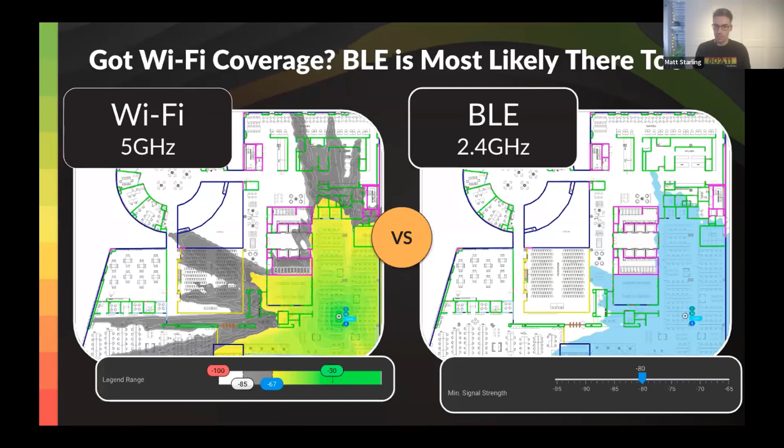Ekahau AI Pro. Yeah, so guys, the sad reality is that most of us, we have access to BLE radios inside enterprise-grade access points. Most of these APs have programmable radios these days that you can use for multiple different purposes. And almost none of us uses these BLE radios built into the APs. Okay, that's the reality. So let me tell you why you would like to consider using BLE built into your APs. So first thing is to transmit beacons.

So try to imagine your APs, multiple of these access points, they transmit beacons very frequently. And then you're walking around with your mobile phone, okay? And then your mobile phone listens to these beacons, and based on the knowledge of the location of the APs and the time, the RSSI of the beacons it heard, it can trilaterate its location, and then you have a blue dot on the map. It's like a turn-by-turn navigation. That's one use case, very strong one.

Some vendors, like Mist, even have arrays of directional BLE radios where it's even more accurate to have the blue dot on the map by default, okay? And it's easy peasy, it's really easy to deploy. Then the second thing that you might benefit from BLE radios is to receive beacons. So your radios in the access points, they listen to beacons from BLE tags. So think of it as asset tracking. You attach a small BLE tag to your, I don't know, your cart, your laptop, your power tool in a

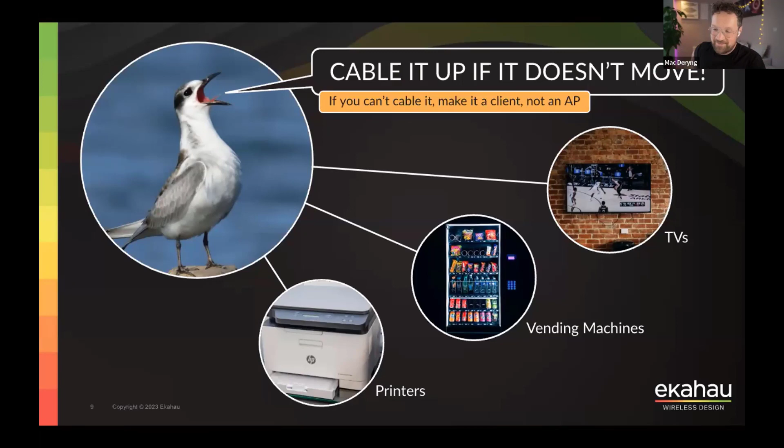And Mac, I know you put this slide together, but we were talking with the team, we thought you missed a bit of a trick here, because since you used a bird, you could have used a starling, and then it would have been a bit of a pun, but never mind, maybe next time. Or instead of a bird, I could have put like an X, right? Yeah, true. Well, maybe we should have an X that goes across it now.

Okay, so now, guys, I mentioned at the beginning that there is a difference in approach when it comes to designing, optimizing, and validating your dual band and tri-band wireless first networks. So I will start with the dual band and introduce it here. Then Matthew will talk you through the tri-band, and then we will go through a very nice demo of dual band versus tri-band, how to design for it, and this kind of juicy stuff.

So first of all, dual band, what we mean by this is just 2.4 and 5 gigahertz radios inside an access point. If you have the same number of dual band and tri-band APs, dual band of course gives you less capacity. If you want more capacity with dual band to match the tri-band design, then you simply need more radios. You need more access points. In the design here, at the bottom, you can see a massive difference in the number of APs. For this particular design that we will be demoing in 2 minutes, I needed 28 dual band APs to have pretty much the same capacity as 17 tri-band APs.

So going for slightly more expensive APs, like tri-band 6 GHz enabled APs, will probably still be cheaper, massively cheaper, than dual band APs. And that's not only because you need more radios if you're using dual band and require high capacity, but if you want to reduce your CCI, which stands for co-channel interference, another name for same channel overlapping or same channel contention, then you need to start being creative with dual band APs because we have a limited number of channels.

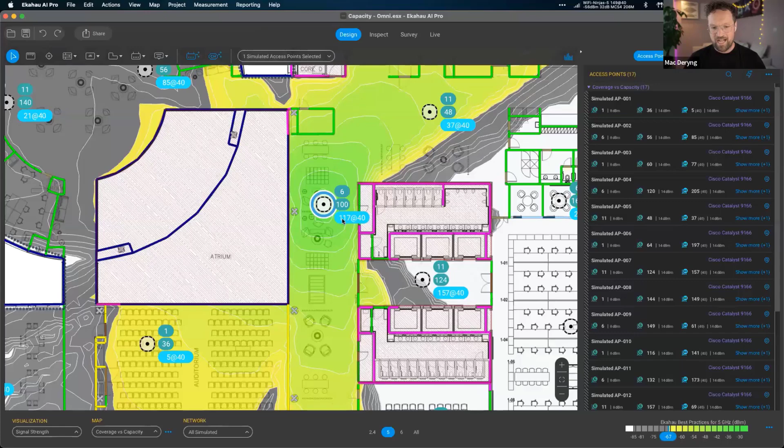So, guys, this is Ekahau AI Pro. And what I have on the screen now is a fairly big office, single floor. And now I'm using tri-band AP. So when I zoom into any access point, let's say this one here, you can see that it's on channel 6, 100, and 117. So 2.4, 5 gigahertz and 6 gigahertz.

So what I wanted to highlight here is the success criteria. So I highlight my inclusion area around the office, and let's see what's inside. Since it's a massive office, we will have quite a lot of devices. What I assumed here is we'll have an equal spread of 5 and 6 gigahertz capable devices. Okay, so I appreciate not all of them will be 6 gigahertz enabled on day one, but most of them, the new ones especially, will be 6 gig capable.

So what we have here is 175 Wi-Fi 5 laptops and Wi-Fi 5 smartphones, and then 175 Wi-Fi 6E laptops and Wi-Fi 6E smartphones. What we've also assumed is that when you are using a laptop quite heavily, like on a Zoom call, for example, you use between 2 to 4 megs per second. When you are sitting on a Zoom call, you won't be using your smartphone too much. It might be on a background sync, you might be checking your email, whatever, but you won't be streaming your Netflix or YouTube or anything else.

So one device will have quite high-ish SLA, so 4 megs, and the secondary device will have quite low SLA, like 1 meg or even lower than that. So we don't want to overkill it here with scoping the capacity. And now when you ask Ekahau if your design will cater for this capacity, the capacity must be quite practical. Okay, so don't overdo it.

If you are designing for 500 users, you probably don't need to assume that you will have 500 users in the office all of the time, because some of the users will be on holidays, in the toilet, grabbing coffee, whatever. And when you have like 350 users at peaks in the office, not all of them will have 4 devices. Some of them will have 2 devices. Some of them will have 3.

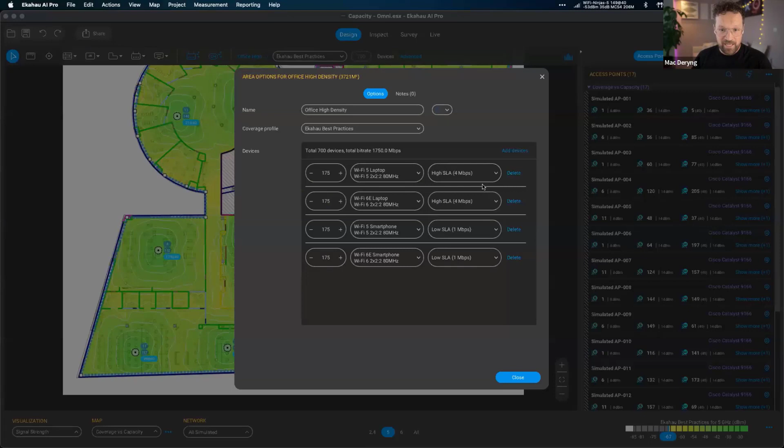So I think this is quite practical for the size of this office. I counted the seats there, so it's quite practical. And we are designing against Ekahau best practices, the Ekahau best practices coverage requirements. So I will show you instead of just talking about it. It's like -67 signal strength on 5 and 6 gigahertz, primary and secondary. Secondary is required for roaming, for redundancy, for higher capacity. It's great to have that stuff.

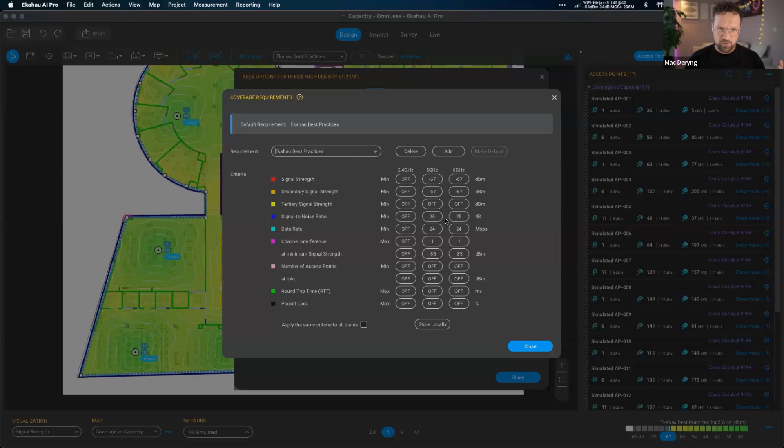And then typical things. So we don't want to have lower SNR than 25 dB, which translates to QAM64 modulation. So high data rates, data rate minimum 24 megs per second. And we don't want to have any channel interference, any CCI, same channel overlapping, 1 at any given channel. Everything more than that, we consider a problem in a design. Simple. 2.4, no requirements there. A best effort band. Okay, so let me close that.

So now, guys, what do you think? Let me know in the chat. What do you think about the design for this particular network? Let me show you some distances between the APs. So this is like 12 meters. These guys are like 11 and a half, maybe 12, 13 meters there, and then 12 meters again, stuff like that. So we have like 17 tri-band APs to cover the office that is 70 meters wide. Is that enough? Is it not enough? Do you feel it's a good design, bad design? Would you have done anything differently?

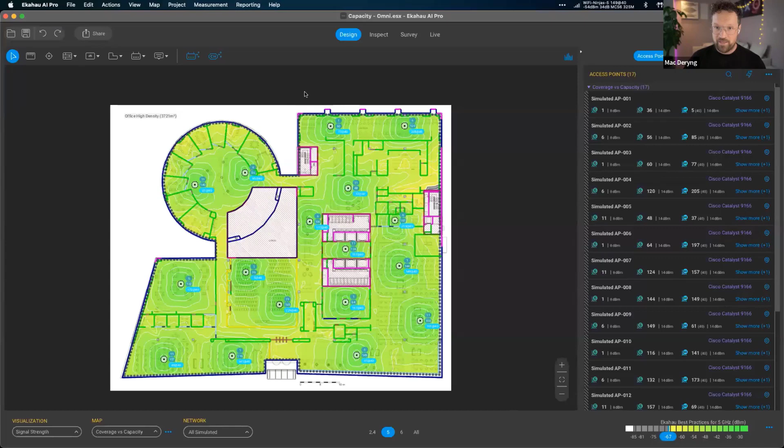Design looks good to me. Surely, yeah, Mac didn't do this. Oh, that's Matthew's. Okay, almost as good as I could do. Cool, guys.

So I think that this design for omnidirectional APs is as good as it can get, pretty much. I know that you can do it in multiple ways. There is no one size fits all. Maybe you can't mount APs everywhere where I planned them to be mounted. Maybe you have some featured walls, featured ceilings, you can't touch them, you can't run a cable, whatever. But it seems like a good density of the APs.

Signal strength is fine. Then secondary signal strength most likely is fine as well. Sometimes, like in the kitchen or in the corner here and there, you don't have a secondary signal strength. And that's not a problem. That's perfectly fine if you don't have it in the area where you don't have to roam. So I feel it's great.

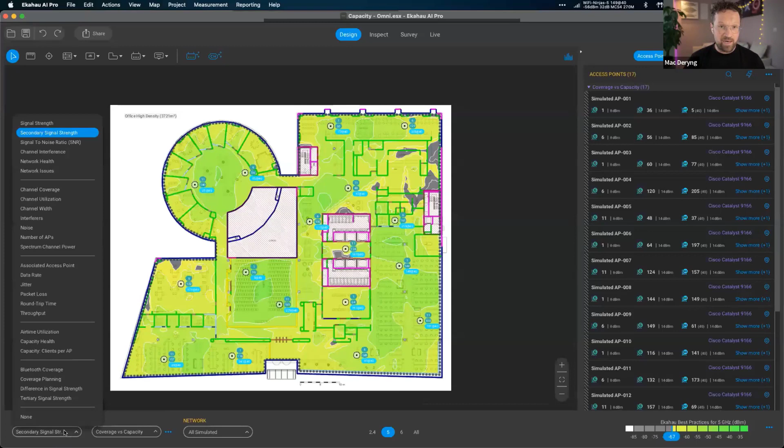But now when I ask Ekahau, okay, against the requirements specified for the capacity, these 175 devices of each type, 4 types of devices, am I passing capacity health requirements? So let me check that. I'm going to capacity health. And now this is a tri-band network. Ekahau feels that 17 APs, 6 gigs enabled, can easily cater for my requirements. So life is good, okay?

I can have a wireless-first office with 17 freaking access points. So probably 1 switch, maybe 2 because of cable length. Easy peasy, lemon squeezy. Cheap, cheerful, and powerful, beautiful, okay, and easy. Everyone can do the design like this. Internal, directional, cheap APs, typical environment, typical enterprise grade access points.

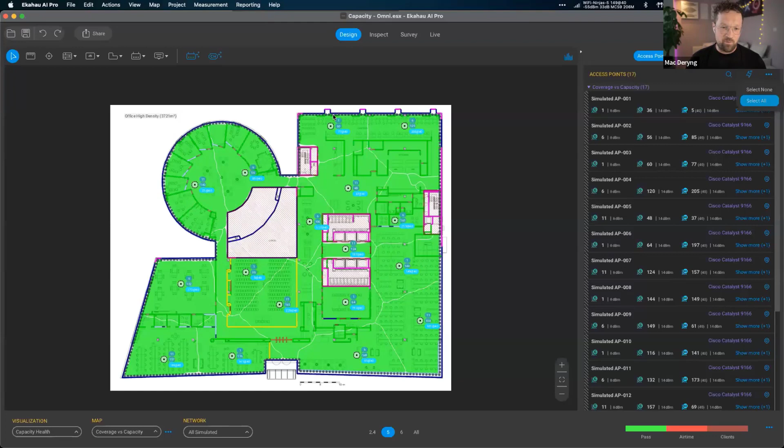Now, let me change all these access points to a little bit older ones. So currently we are using here, for this example, Cisco 9166, which is a flagship AP from Cisco. I could have used Aruba or Mist or whatever. All the flagship APs will be similar. Okay, they're all amazing. And for the sake of this example, I will be downgrading these access points to whatever most of us have these days, like 9120s or 9130s from Cisco. Now, yes.

Before you do that, you've had a request if you could show your network health visualization. Network health visualization. This is my network health visualization, and that's a pass or fail. When it's red, it fails. But when I switch to network issues, it will color grade my problem, which is yellow. It means secondary signal strength in the highlighted areas.

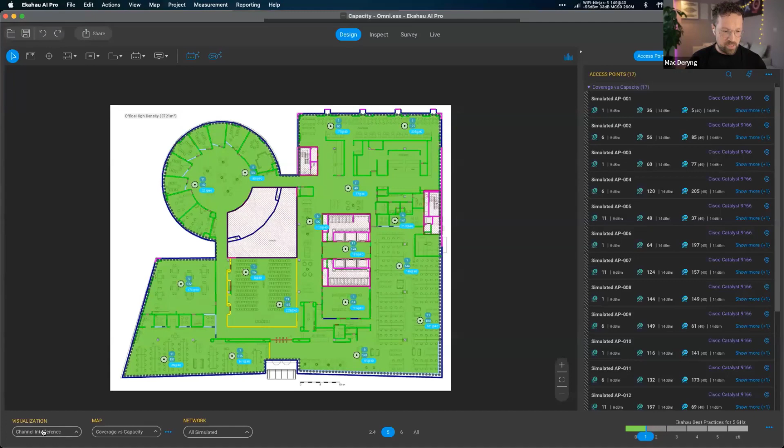I don't have any other issues. I don't have CCI. So when I go to channel interference, there is no CCI at all. The network really looks healthy from a design perspective. Okay, I hope that this answers this question. So now let me disable the visualization.

I will select all access points. I will edit multiple selected APs, and then I will change the model of the access point from 9166 to 9130, which is the flagship access point from 2 years ago. Okay, it's like dual band without 6 gigahertz radio. And all the attributes, they stay the same. I haven't changed anything when it comes to power. It's all default, ceiling mounted, 2.4 meters above the ground, easy peasy lemon squeezy.

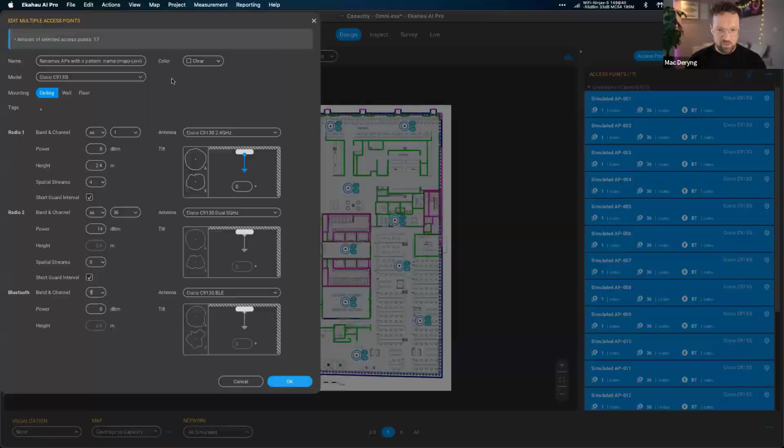I will quickly recalculate the channels because now they all sit on channel 1 and 36. So let me do a quick channel recalculation. Let's not disable 2.4 gigahertz radios in this example. 1, 6, and 11, always, guys, 1, 6, and 11, never use different channels. 20 megahertz on 5 gigs. Cool. I hit create, so Ekahau will quickly calculate the channels for me across both bands.

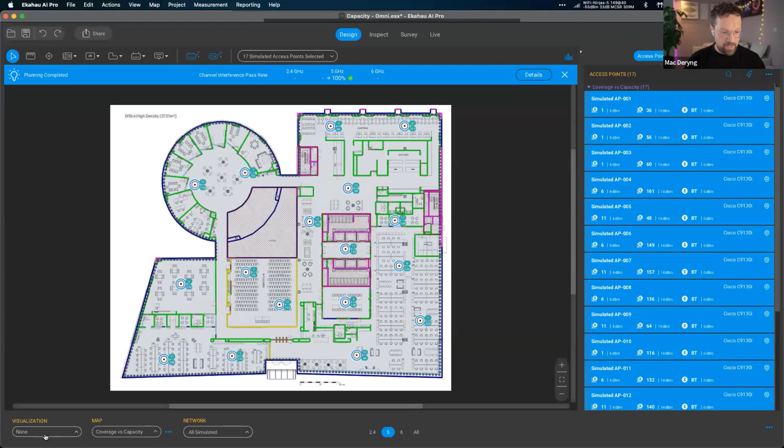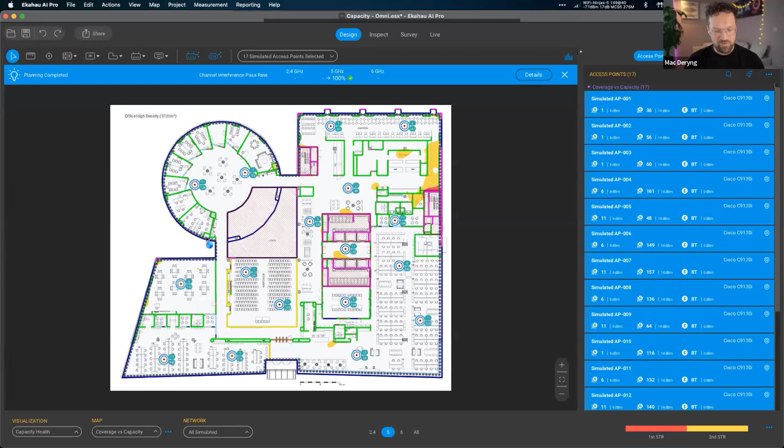I have 100% pass. So now when I go to, let's say, network issues again, this shows me network health from the coverage perspective, and coverage will be very similar, right, between 9130 and 9166. But I haven't changed my capacity requirements. I still have this 600 or 700, whatever devices. When I go to capacity health with dual band APs now, most of it fails, okay? Most of it fails, and it's really, really bad. It fails pretty much everywhere.

So when I switch from tri-band to dual band, I lose capacity. Tons of capacity is lost, and the cost of the network, of maintaining the network, is pretty much the same, okay? So be mindful of that. Now, let's discuss quickly, how would you have to redesign this network with dual band APs if you wanted to have the same capacity as you had with tri-band APs? So tri-band APs, it was enough for me to have 17 of them, okay?

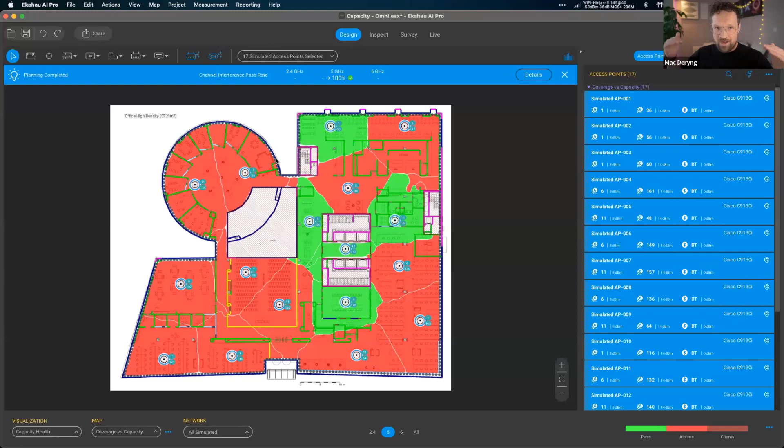Thomas says increase channel width. But if I increase channel width, then what's going to happen in the multi-tenancy building? I will increase CCI and I will hurt my network even more. So if I increase the CCI, then the airtime utilization, the contention will go up, and up, the higher the CCI gets, and it will be slower. I won't be having any benefits from wider channels there, okay? So it might work if you have no neighbors, but here it probably won't.

More APs and lower power. I kind of agree and disagree at the same time. If I add more APs and lower power, what I'm hurting mostly is the clients close to the access point, because their MCS rates, their data rates will drop significantly because over the first several meters away from the AP, the RSSI loss is very steep. Then you move further away from the AP, where the APs contribute to CCI, and reducing transmitting power level doesn't really change the CCI, okay? Very, very minimal positive effect on lowering CCI.

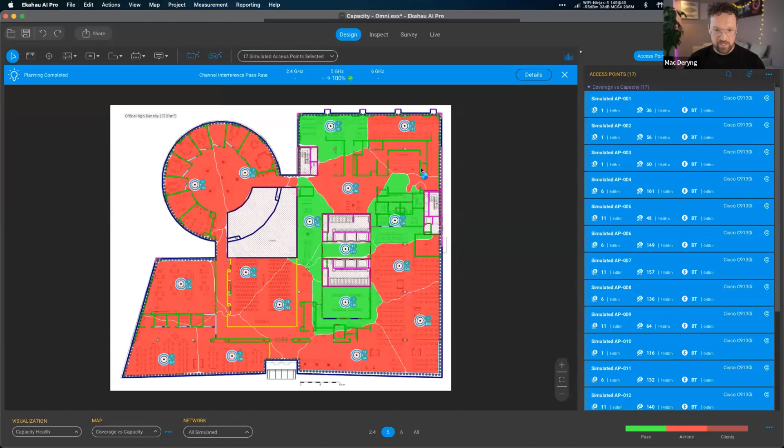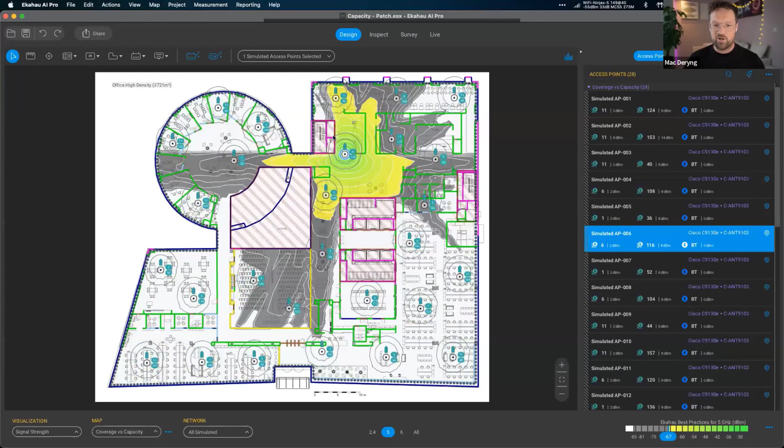So what I would do, I will open up a different project. So remember the position of these APs and 17 of them. I'm just opening a project that I prepared for this webinar, so it's a little bit faster. And now what I have in front of us is the high capacity design with dual band APs, and now I have 28, okay? So capacity health is a pass everywhere, and signal strength and everything else will be very solid. So now what's changed from the design perspective, look, when I highlight the AP, it doesn't cover as much as the access points with internal omnidirectional radios.

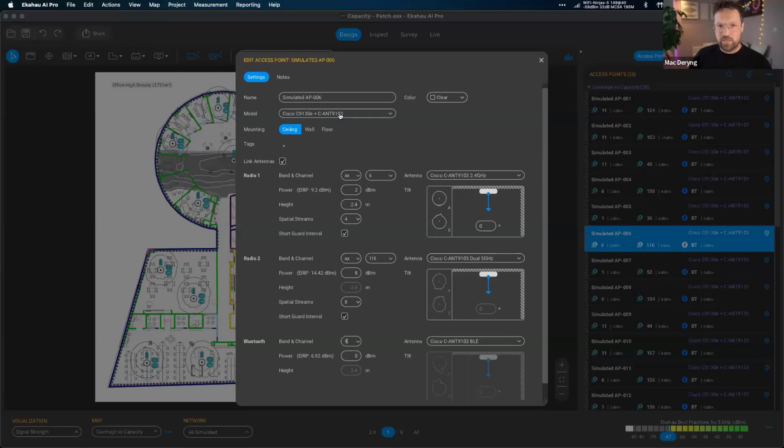When I right click, edit AP, now you can see that these APs, they are still ceiling mounted, and they have 9103, which is like a patch antenna that points down and creates a cone of coverage. So now I can add more radios to increase my capacity without really increasing my CCI. So in this design, I hope I haven't checked that, no CCI, okay? So I have no CCI on 5 gigs with 28 APs. Life is good, okay?

So capacity requirements are met. Everything is happy, coverage is there, everything is great. But now I have 28 APs and 28 directional antennas, 28 cables, 28 mounting brackets, a more sophisticated design. And it will be like at least 2-3 times more expensive when compared to just moving to 6 gigahertz. I kid you not, okay?

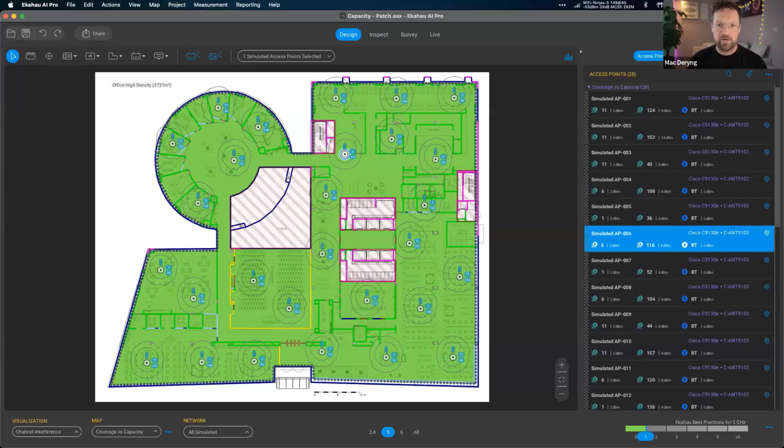So that's pretty much everything I wanted to show you about this particular demo. So I will stop sharing. We'll go back to slides. And if you have any questions, shout either now or towards the end of the webinar.

Change antenna pattern versus reducing power, then yes. So we want to change antenna pattern versus reducing power. If you reduce power too much, you are hurting clients close to the AP. So don't do that, okay?

If you are designing with directional antennas pointing down, you might reduce power a little bit because antennas will have passive gain and the clients in the effective coverage cell will still have great MCS rates. So you can reduce it a little bit, like by 6 dBm, for example, on all the bands that you are using. Yeah.

Thank you for that really great demo, Mac, and some really good questions were coming in whilst you were going over that. Before we jump into the next demonstration, one thing we wanted to say really is that when you do move to a wireless first or wireless only deployment, regularly checking and optimizing your wireless networks becomes more important than ever. Wireless is the #1 main form of connectivity now for all of our client devices. No one wants to be connecting anything to cables anymore.

But when your business is running on Wi-Fi, when the Wi-Fi stops, business stops. You can't get into the warehouse, you can't scan that inventory, you can't get that stock out, you can't make your orders. When you're in an office and you're trying to have calls with customers, the last thing you need is a choppy video call over Wi-Fi when you've got a really big presentation to deliver.

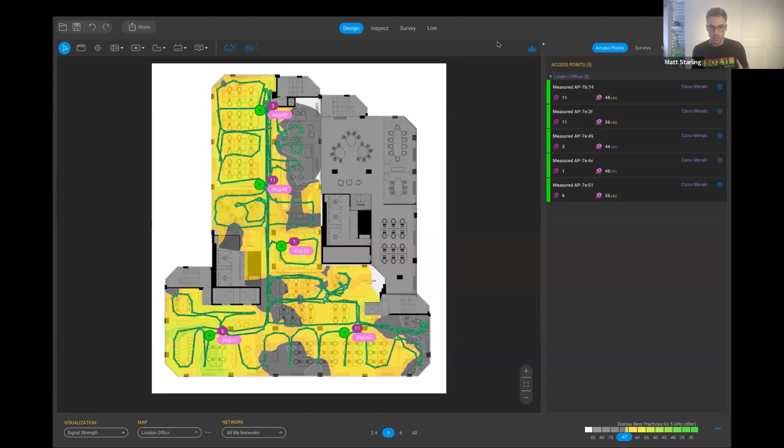And I want to give you an example now of a small office in central London where they want to be a wireless only office. So they've got 5 access points currently deployed in this environment.

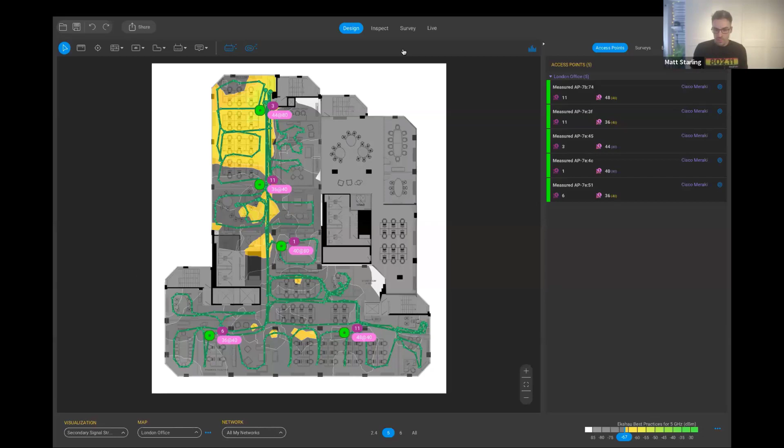For example, when I look at this now, I can see there's clearly some issues with the coverage. If I take a look into that, go into the inspect tab, go back to the primary coverage, click on one of these gray areas, and click on this little eye icon, I can see that the transmit power is down at 2 dBm, which is really low. So now when I come back here, I want to open the Optimizer file. Let's take a look at this one.

I could analyze the data in the cloud directly and go one by one through those visualizations we were looking at before, or I can simply click on Optimizer, ask Optimizer, and it gives me this breakdown of different categories and criteria, and it says straight away, look, it's red. You need to improve your primary coverage. When I click on that, I can see the visualization heat map that we see in the desktop software, and that it's got issues with the coverage.

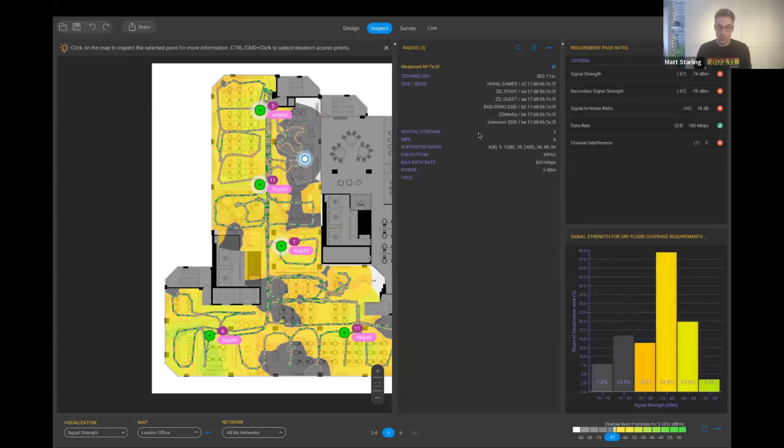When I look at the best practice recommendations we want to be achieving and check the requirements, it says increase your transmit power to 14 to 17 dBm if it's currently lower. And I can see that this access point, for some reason, has its radio turned all the way down. Maybe something happened in the environment that caused the access points to power their radios down, but that's caused us coverage issues and problems with the network. Devices trying to use the environment there won't perform or behave very well. And that's just one example from Optimizer.

I can scroll through any of this list, like secondary coverage, and we can take a look at rogue devices. We've got some rogue devices here. If I click on it, it tells me where they are, which could be causing us some interference or issues on our network. It shows us where they are. Maybe those printers we were talking about that have their wireless enabled. So I can see them here clearly.

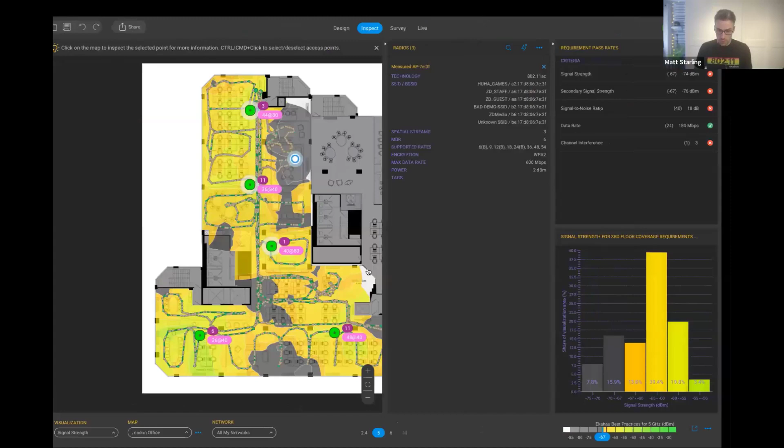I can go and locate them, remove them, reconfigure them, and get them off our network, because that's what's causing us these issues. So that's just a few things that we can see in Ekahau Optimizer. And then what we actually did is we followed these steps. When we were there, we followed the steps from Ekahau Optimizer with all of these different step-by-step guides on how to improve the network.

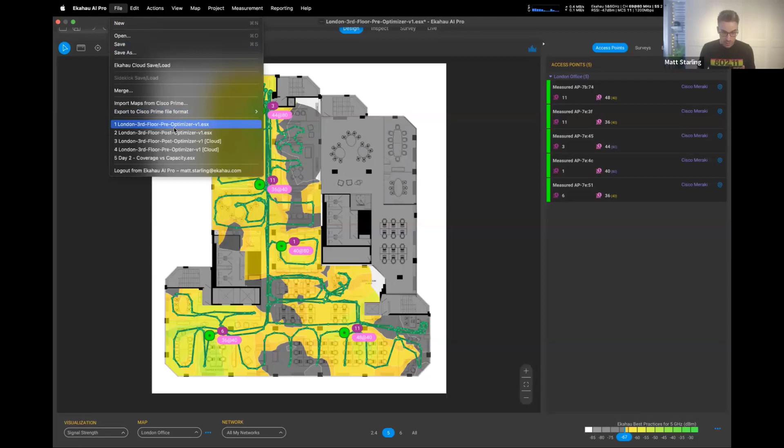And then we reevaluated the environments. We walked around it again. So I wanted to actually just quickly show you the difference of the file. When I take a look at it now, the exact same location, no new access points, no new cable runs. Let me just look at my networks on 5 gigahertz.

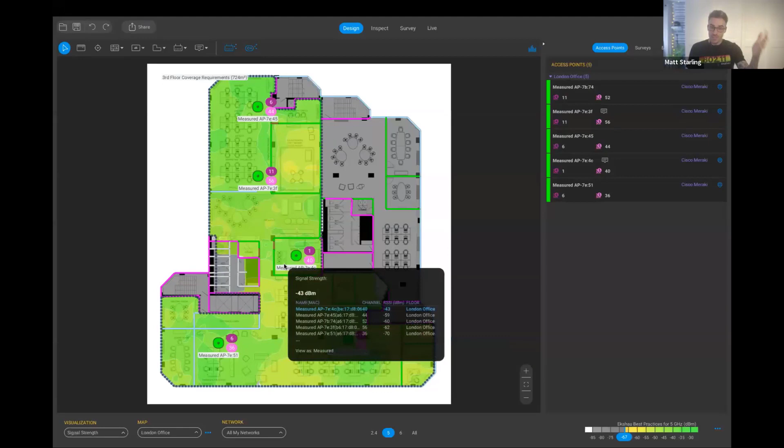All we did is we just followed those recommendations, and we fixed the channels, we fixed the issues with the transmit power, and now you can see that we've got the coverage everywhere. So now they can actually go to a wireless first or a wireless only environment. So it made a huge improvement. So that's Optimizer, and making sure that you're constantly optimizing your existing wireless networks to provide this wireless first form of connectivity.

But the other thing that I wanted to show you very quickly that we spoke about earlier is that if you've got a wireless only environment and you've got enterprise grade access points that have got these Bluetooth radios, how can we see or visualize that inside of Ekahau? So what I'm going to do quickly is just get rid of all of this survey data, and then let me place a few simulated access points. So I'm just going to delete that.

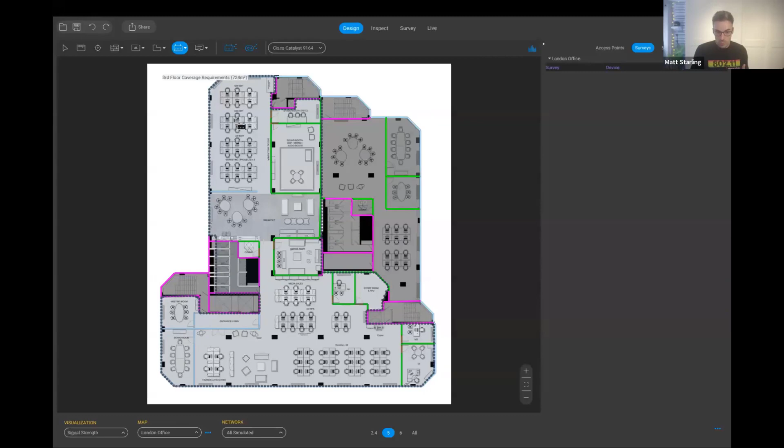And once that data is gone, I've got all of the walls information in here from the data we collected on site. I can just go and grab one of these access points, perhaps this one. And when I place the access point, if I just turn off names quickly, and if I zoom in a little bit, you'll see we've got the first number here, that's the 2.4 gigahertz radio. Then the 5 gigahertz radio is the number 36. And then this is the 6 gigahertz radio.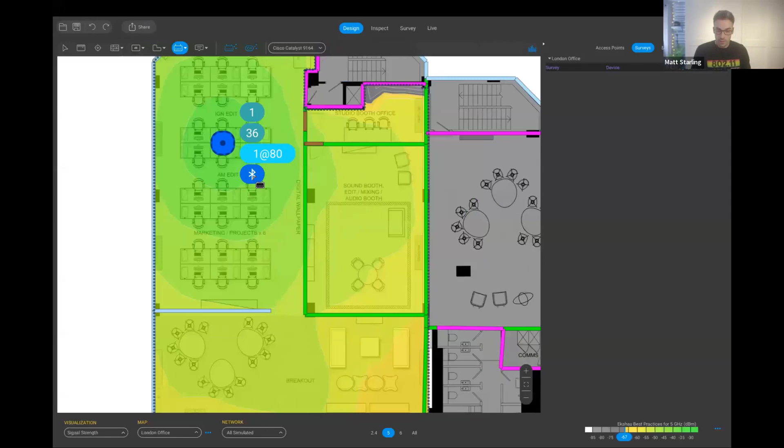But look at what we've got here. We've got that Bluetooth BLE icon. So if I now change the visualization from signal strength on 5 gigahertz to, let's say, Bluetooth coverage, I can now actually plan and design my BLE coverage from my Wi-Fi access points.

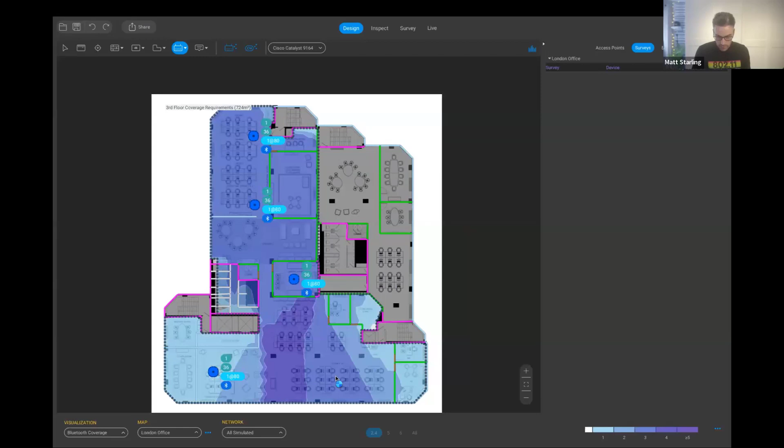So when I'm taking into consideration where I want to plan and place my access points, maybe I'll put the APs in a similar location to what the actual deployment was. I think there were a few access points around here, just like that. I could go back over to the signal strength coverage, and it looks very similar to that pattern that we saw in the last file. So we can see our Wi-Fi coverage here, but also now when I go to the Bluetooth coverage, we can see that the office is completely covered in BLE coverage as well.

But perhaps you want to understand in your office environment how many meeting rooms are occupied, how many people are in the rooms, can I get access to it at certain times. And to do that, you may not want to install really expensive APs in the room just for the Bluetooth radio. So in Ekahau, you can also design using Bluetooth beacons just by coming to this access point icon, changing it to the Bluetooth beacon, and then you can pick one of the Bluetooth beacons in here, for example, Aruba.

Then you can put it into all of the different meeting rooms that you've got around your environment. So you can then perhaps use that data and analytics to find out when you can and can't get access to these meeting rooms and have a better meeting occupancy rate.

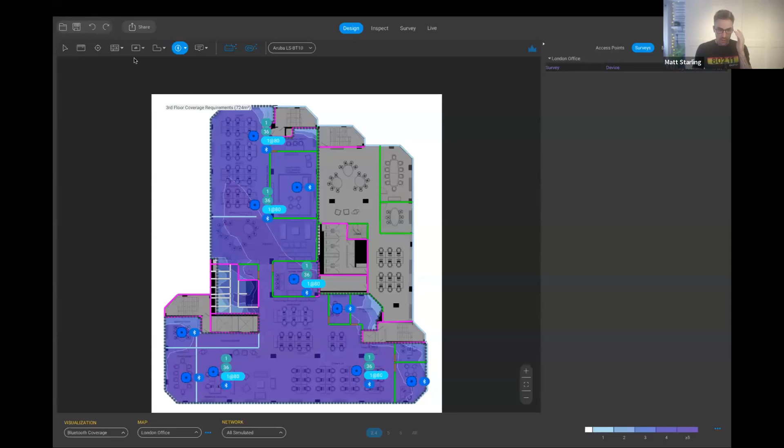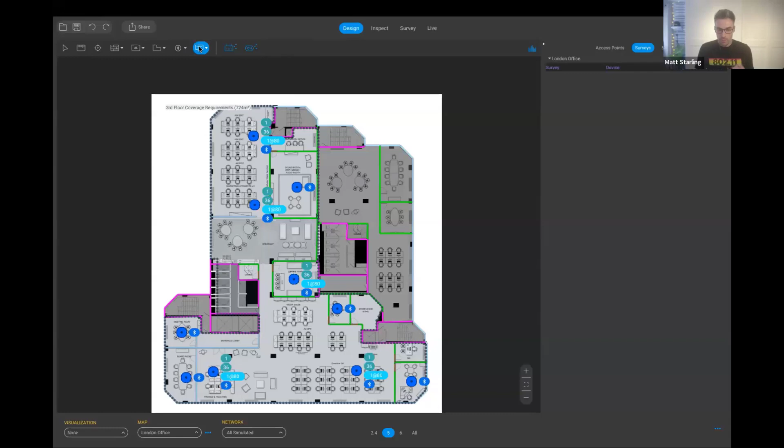And then the last thing that I just wanted to quickly show you, that you may not be that familiar with, since we were talking about some of our devices that we need to cable, is, well, I'm going to just drop something here called a map note, because I noticed something on this floor plan. If I just zoom in, I can see that there's a comms room right here. So I can drop a map note to tell myself, okay, comms room.

But then what if I want to work out the rough cable length from the comms room to my access points or to my BLE beacons, because we want to make sure it doesn't exceed, let's say, 90 to 100 meters in cable length. Well, what I can do is if I change this map note icon from the map note to cable note, I can come to where the comms room is here,

and then I can draw the path from the comms room to one of my furthest away access points, which could be up here, and that's coming in around 20 meters. If I go just to where this access point is, we can see it's around 23 meters. I just left click, then right click, and then I would factor in a little bit of vertical cabling, so maybe 2.5 meters on either side of where the comms room and the access point is. And I would just say comms room to AP1 is 28 meters.

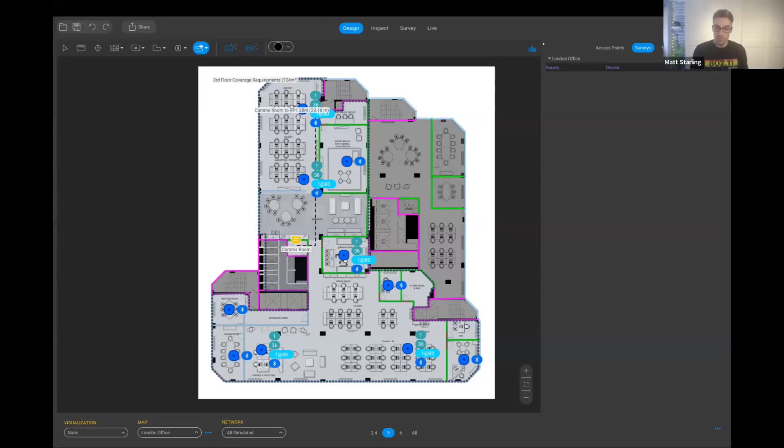So then you can do that for all of your access points, all of your beacons, and you can plan to make sure that you've got enough switches, enough capacity, enough cable length, and if you need to potentially install some additional cables. So that was just a few things that I wanted to show you quickly, and I'll just head back over to the slides. Okay, and back over to you.

Thanks, Matt. That was an awesome demo. So I learned nothing from you. Actually, no, it was good.

Cool. So guys, since we are discussing wireless first, let's very quickly mention other things rather than just optimization and design. Design is super important. Optimization is probably even more important, because the reality is most of us don't have the luxury of designing our networks or redesigning our networks. We get what we get. We inherit these networks. So our mission should be to make the most out of them. So optimization is a massive part of our daily roles.

But guys, outside of all of that, try to look at these three things. These are the amendments that make our roaming authentication faster. First amendment, 802.11r, extremely important. So you might have the best network in the world. If you don't have 802.11r enabled, and if you are using a Radius server in the backend, then every time you authenticate to the Wi-Fi network, you go through full Radius authentication in the backend.

Okay, that's fine when you do it once, but every time you jump from AP to AP without 802.11r, you go through the full backend Radius re-authentication, and it takes time, sometimes seconds, at which point your voice call, your conference call, they are gone. Okay, so 802.1X networks with Radius in the backend always use the 802.11r amendment on the Wi-Fi side, always, okay? When you do that, you just initially authenticate against Radius, and then you don't have to do it when you roam between APs. Very important.

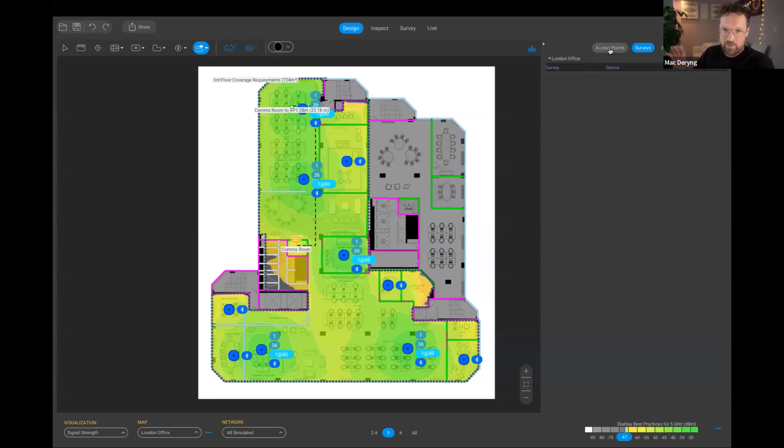So guys, in Ekahau AI Pro, you have a tick box, view as mobile or not. If you don't view as mobile, then all you see is the attenuation, free space path loss, maybe reflections and refractions, depending on what model you're using. But typically it will be just attenuation and free space path loss. If you enable the button that Matt is now showing you, around 8 to 10 dBs will be detracted from the RSSI that your devices will be seeing, from the coverage.

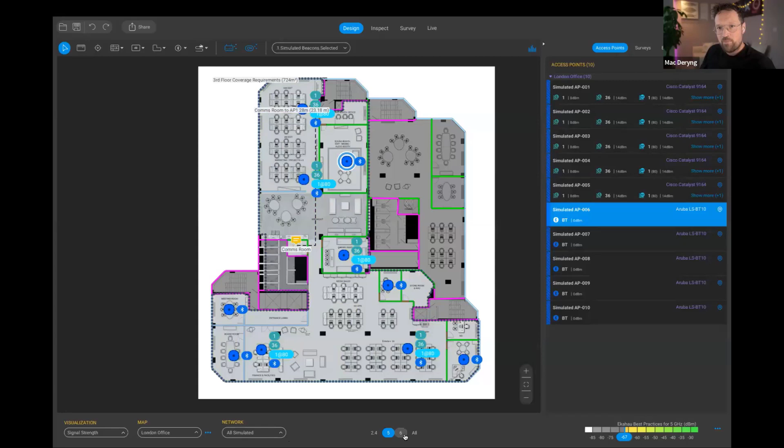And that would translate to probably you designing with too many access points, because when you are designing to -67, that's Ekahau best practices, we are already factoring in the lower sensitivity of mobile devices. So -67 in Ekahau will translate to -72, -75, -77 at the edge of the cell from the iPhone perspective, and it's perfectly fine. You already are factoring it in.

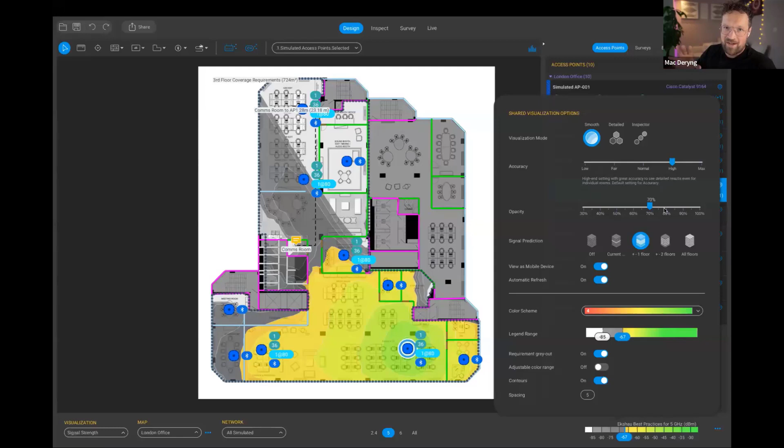Now, if you still want to enable mobile view and design to -67, now you are really designing, from the free space path loss and attenuation perspective, to -57, and that's just crazy. You will have way too many access points, and you don't need that. Remember that -77 from the phone perspective is still perfectly fine.

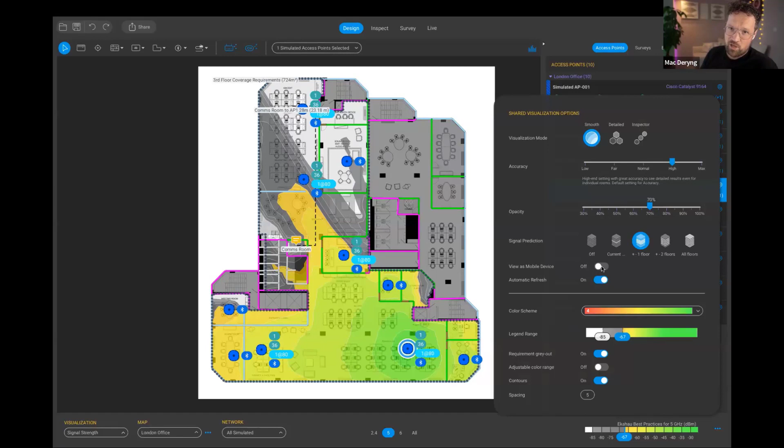My wife downstairs through the concrete floor from my mobile router is working on -85, and she's absolutely fine on a MacBook. On her iPhone, it doesn't work anymore because it's close to -90, so it's a little bit too low, but -77 is still fine. So don't use mobile view. That will be my opinion, especially for designs. For validation, that's a different story, but for designs, never use that.

Another question was, from Fabian, what type of Meraki AP would you suggest to install around the main shopping center hall, where very often it's crowded and at Christmas they install a roller coaster, Santa Grotto, etc. Long story short, if you have potentially loads of users in a small geographical area, like the roller coaster area, just install tri-band APs and you're good. As many as you can, like 10 or 12 meters apart, you're fine.

If you still need more radios than that, then start installing patch antennas pointing down. It's currently very difficult in 6 gigahertz because of the device classes and not having AFC ready everywhere in the world, especially outside of the US. So you can't really use external directional antennas on 6 gigs. But if you are using dual band 2.4 and 5, then start using patch and sector antennas to divide the spectrum and reuse the frequency more efficiently, and therefore have better capacity in your Christmas network. I hope that answers this question.